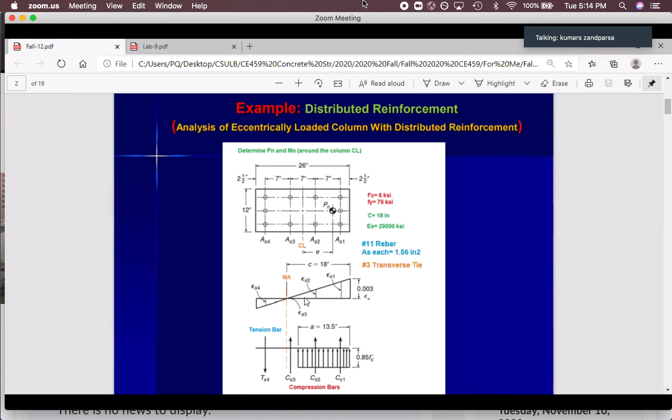That's it. So you can see from here to here is 18 inches. From this rebar to the end is 7 plus 7 plus 2.5, meaning 16.5. But this is 18, so it means that epsilon S3 for this rebar is in compression, because this side is in compression. When it's compression, we know that the compression for the concrete should be 0.003. That's epsilon U for the concrete.

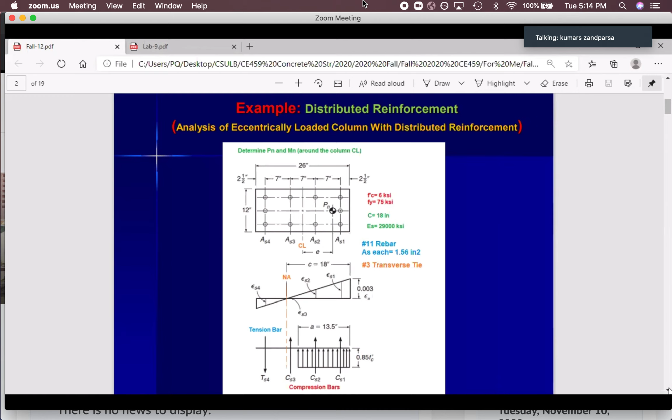Okay, then write the equation to find epsilon S1, S2, S3, and epsilon S4. We know those are in compression, so we can call them epsilon prime S1, epsilon prime S2, epsilon prime S3, and epsilon S4. Doesn't matter, see which one is good for you. But if you see either one, it will give you the information that you want.

Yes, what's the question? What was that point PN again?

That's the location of the point load. It means that the load is not at the center, so there's eccentricity. It means this column - that's a plan view of the column - has a load Pn plus a moment Mn. What's that moment? Moment is Pn times E. Can you remember from last week?

Let me show that. Consider we have a column - that's a column, down to the footing. That's the elevation view. So that's the center line of the column.

If the axial load is here, you have no eccentricity. Eccentricity is equal to 0. So in this case, you should show Pn here.

But if the load is on this side, as you might remember, if we have Mn and Pn, that's the axial load. Imagine we have both of them. In this case, I can show this like a column with this axial load on the center line, and I can show this Pn at whatever distance, with eccentricity equal E from the center. And this load is Pn.

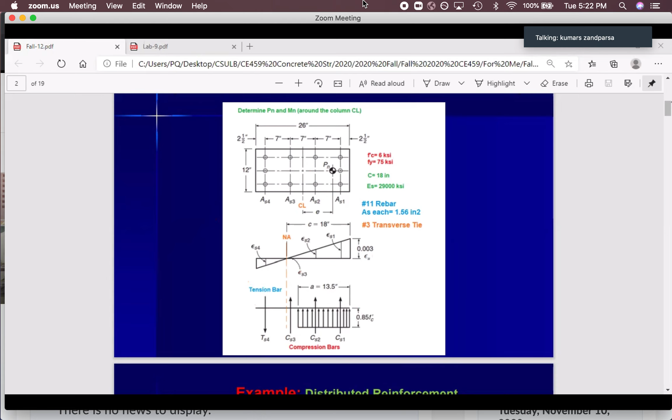I'm going to find epsilon 1. Start with epsilon 1. Over here I call them epsilon prime because they are in compression, but it doesn't matter. This is the compression part: 1, 2, 3 are in compression, 4 is in tension. So I renamed them epsilon prime to make that more clear.

What's the equation for epsilon prime in this diagram? Always for compression, this is their equation: epsilon prime S equals epsilon U times (C minus D prime) divided by C, times F prime S for this bar. That's actually epsilon U times this, which means epsilon prime S times ES. So epsilon prime S times ES must be less than or equal to FY. If it's greater than FY, consider that equal to FY. If it's less than FY, consider it whatever it is. In this case we are using very high grade and expensive rebar, FY 75 ksi.

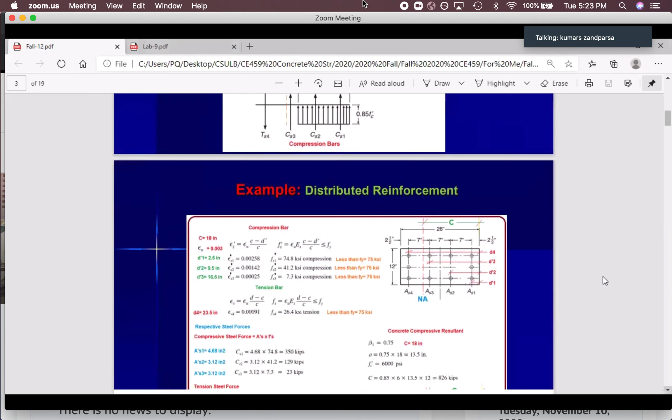So let's start with this equation and find these parts. I named them, look at this. For AS1, D prime is here. For AS2, we are going to use this equation. I named them just so you remember how to use them. Name them correctly and use them correctly.

For AS1, D prime is here. For AS2, D prime is here. Why D prime? Because these are compression bars. AS3, D prime is here. AS4, D4, because it's in tension. I changed them to make that more clear: 1, 2, 3 in compression, so I call them D prime.

4 is in tension. The solution here is not exactly the same as the solution in the book. I think this one is more clear, otherwise you have to jump from this side to that side to calculate those numbers. I think if you concentrate on this one and understand it, then go to the book and read that one, you can understand that as well.

So for all the listed givens, you put primes there just to know that what we're using is in compression, rather than getting confused if it might be in tension. That's correct, okay, that's correct.

First of all, show the neutral axis and all the rebar at the right side, because we have moment this side. If you have the right side, you have compression. The other side is at the E direction. Just remember, always at the E direction, all the rebar after the neutral axis are in compression, the other side in tension. So I can see two raised hands.

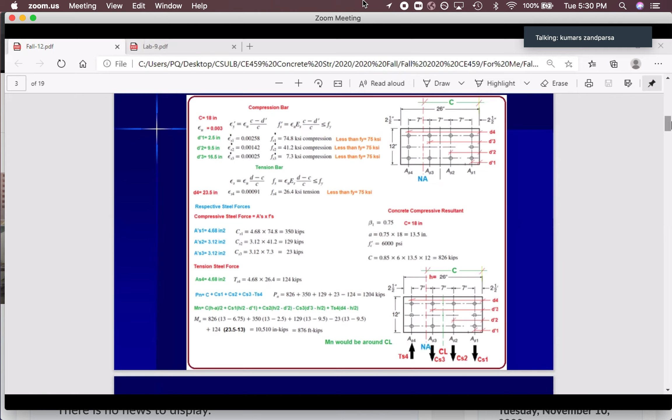Let me go back to this one. We have rebar in compression plus concrete in compression. Then we have rebar in tension. We might have 2 layers of the rebar in tension, or 3 in tension and 1 in compression. It doesn't matter, as soon as you know the location and whether it's upward or downward, show them correctly and then follow the instructions that I'm giving you here.

Yeah, that's it, it's too easy. Just try to follow this and understand. And if you have questions, ask me, to make sure at the end of this class you have no problem solving this kind of homework.

So how can we find beta 1 from the equation for F prime C equals 6 KSI? If you go to that, you will get 0.75. And C is 18. What's the equation? The equation is 0.85 F prime C times A times B, always. That's the equation we always have. That's good for beam as well, exactly the same as the beam when you are bending.

So what's A? A is beta 1 times C. We calculated beta 1, so we can calculate A. What is B? It's perpendicular to the eccentricity. We have eccentricity in this direction, so this is your B, 12 inches. A, 13.5. F prime C, 6 KSI, 0.85. That's your total C.

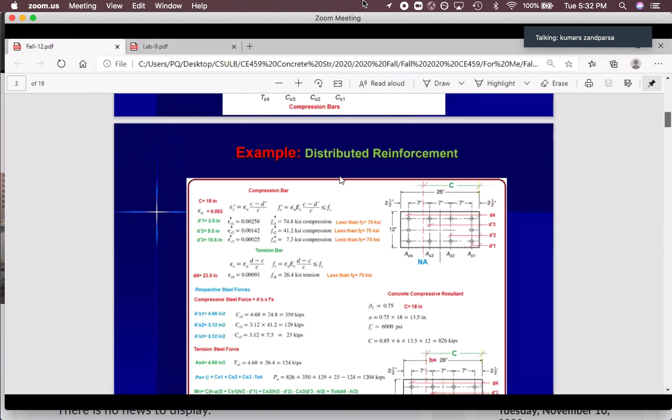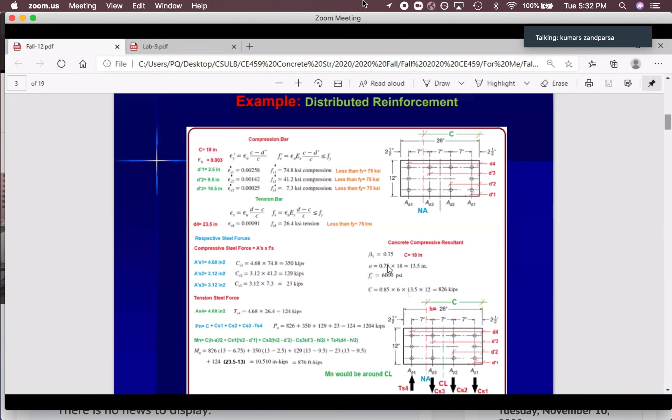So as you can see, let me show this one more time here. The total of this will sit at A over 2, somewhere out here. We have another compression from concrete, 3 compressions from the rebar, 1 tension from the rebar. Okay, so far we calculated all the tension and all the compression for the concrete and the rebar.

What about the tension in the rebar? Tension, we always go with the same equation. AS, we have AS4, 1, 2, 3 rebar. So 4.68, 3 number 11, times FS. FS4 is 26.4, plug it in here. That's it, do the same.

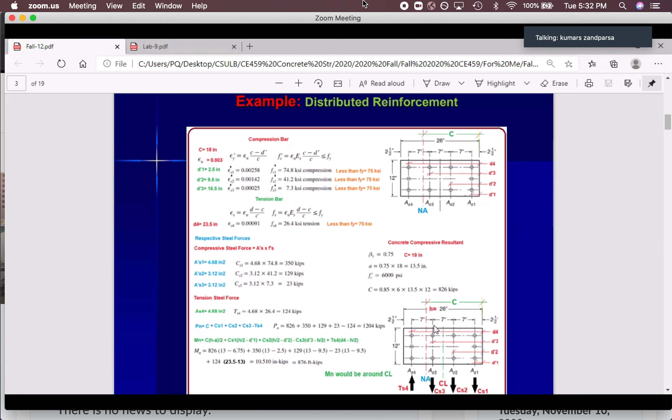But when you want to show them, show the tension in the opposite direction. Compression, for example, this direction, because you are pushing downward. So this is critical, to show them correctly. Compression will go down, down, down, and tension upward. And we have another for the concrete as well.

Okay, so how can I write and find the Pn? Always Pn is like this: total C. This is not neutral axis, this is force, meaning this one, total force coming from the concrete. It should be downward because it's compression. Downward plus CS1, look at this, downward plus CS2 downward plus CS3 downward.

If this one was upward, forget about that one. C, compression concrete, CS1, CS2. If we add just these two — but here this C is at this side, we have three rows of rebar under compression, so we will add all the compressions together, minus all the tension. Over here we have one tension. And we calculated all these forces.

C, 826. C1, if you go to this one, CS1, 350. CS2, 129. CS3, 23. Minus T, 124 kips. That's your nominal axial load capacity. This column can carry this much load for axial load.

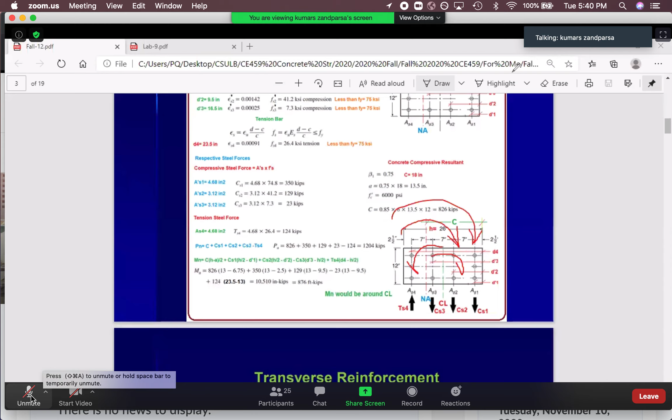Okay, D prime, let me show that to you. We calculated them here. Look at this. This is D prime 1, D prime 2, D prime 3, D prime 4, D4. Is that clear?

Professor, I think one of the things I noticed for D4, since it goes past the neutral axis, that bar becomes in tension. Sure. When you have a load at this side, meaning eccentricity parallel to the C, anything on the other side of the C should be in tension. The rest should be in compression.

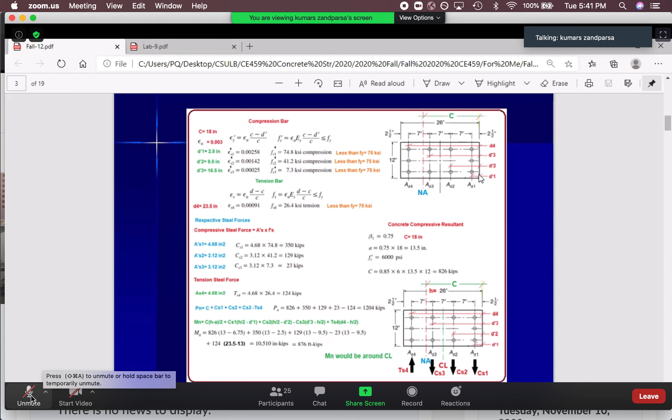Okay, clear? Yeah, perfect. So as you can see, follow this instruction. I try to make this as simple as possible, following from just one side. Instead of measuring from this side and that, it doesn't matter. You can measure from this side to find the distance from the center line to this, or center line to this one. You can do it from any other direction you want. But with this method, you will always measure from one side. Maybe it's easier, so hopefully it's easy for you guys to follow and understand.

And at the end, for the spacing of the tie bars, for shear reinforcement for the column, as you might remember, maximum tie bar spacing is the minimum of these three: 16 times the diameter of the main bar, number 11.

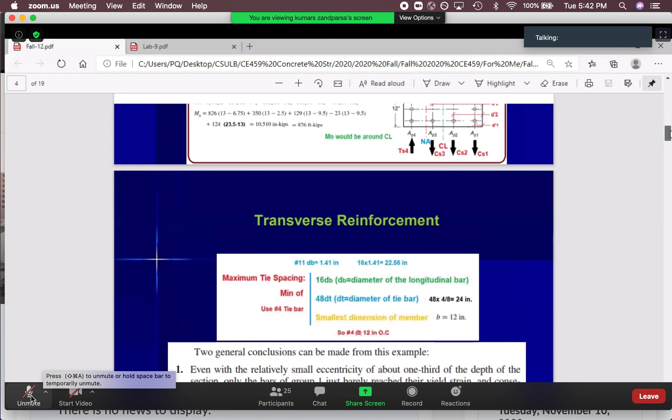Diameter is 1.41, 16 times of that. 48 times the diameter of the tie bar. We assume tie bar number 3, meaning number 4 here. Use number 4 tie bar. 48 times of that. Number 4 tie bar diameter is 4/8, so 24 inches. And the smallest dimension of the member was 12 times 26. The smallest dimension is 12. So between those three, pick the minimum of these three, so use number 4 at 12 inches.

This is the minimum required tie bars. You might go with smaller than this, but you can't go with more than this. You can't go with 16 inches, but you can go with 10 inches, 5 inches, not more than this.

Okay, but let me go after this to give you some more information. These informations are for those that want to compete in good schools, and I think all of you want to do that.

So can we see the designer made a good decision on this, picking 75 KSI rebar, very expensive KSI rebar? Is that a good decision or not? How can we catch that? Look at these numbers. Just this rebar got close to 75. Look at this, the rest is almost half, nothing almost, even tension is too low.

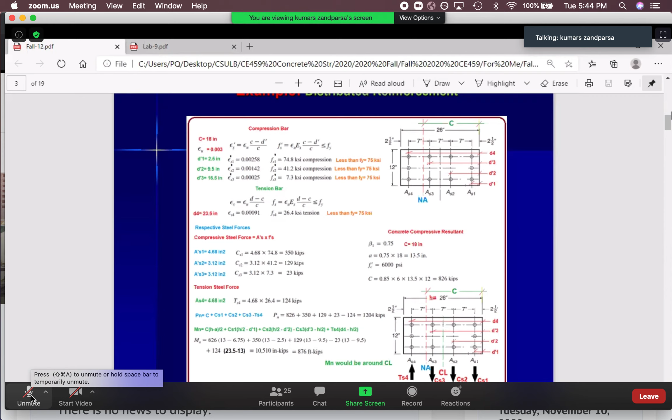So it means that wasn't a good decision to go after this kind of rebar with high strength, with expensive price that the homeowner should pay for, and get almost nothing. A quarter of the rebar will reach close to that, 75% of that is too low. So that's not a good decision. It's better to change the rebar installation or change the FY for the rebar. As you can see, this is not a good decision. And you can check that with the stress in the rebar to see if it's acceptable or not, a good idea. Okay.

Circular column. This is good for those that want to compete with other schools. What can I do? How can I do with this? How can I do this? Do the same, no difference.

Look at this, D1, D prime 1. Here is the neutral axis, so this side is in compression, the rest are in tension. So you can see CS1, CS2, C for the concrete in compression, TS3, TS4, tension, tension, compression, compression, and compression. That's it. Then go with this. That's the neutral axis C.

You know the C. Go with epsilon prime S, epsilon S for tension and compression, the same as before, nothing is changed. The only change is how to calculate the area of this part of the circle. That's it, because A times B is the area of that part, 0.85 F prime C AB. Over here, you know A, but there is no B. What's A and B? A and B is the area of the concrete under compression. So find the area of this part that is under compression.

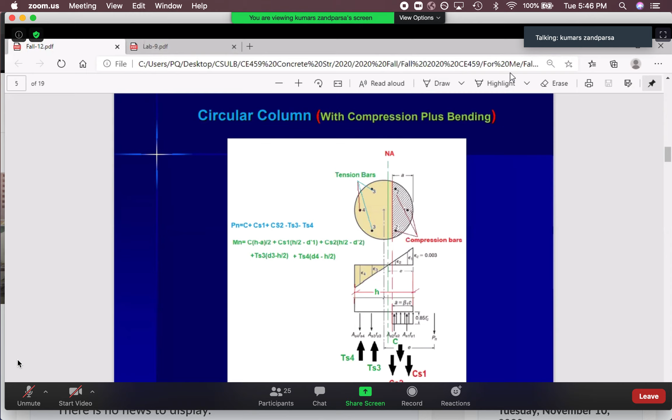Let me answer a chat. Why is the load distribution on less than half of the column? It depends on the eccentricity. When you have a huge load, huge eccentricity, you will get a small part of the column under compression, the rest will go on tension. If there is no eccentricity, the load should be at the center, so everything, concrete and rebar, should be under compression.

As soon as you get moment, you will put part of the column under compression, another part under tension. If you have huge eccentricity, sometimes the point load will go off the concrete. It means that moment is huge. Moment divided by P will give you the eccentricity.

Based off that, you can actually find the C. Once you know the C, you can consider what rebar is in compression and what rebar is in tension. That's it.

How can you calculate this part? I'll ask you guys, if you like, go and learn. It's part of the geometry. It's not that hard, but you can calculate this part.

I'll give you some easy solution because we're getting out of time and I have a lot of other stuff to cover. If I connect this to this with a straight line, assume these are a straight line, you have a triangle here. Assume this is a straight line from center of the column.

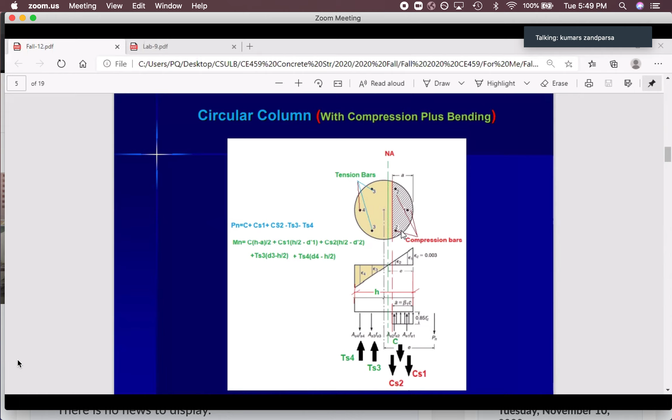Show to yourself that you can do it. It's not that hard for you. Okay, then as soon as you find that, that's it. The equation should be exactly the same, no difference, except a over 2 for this one is not a over 2.

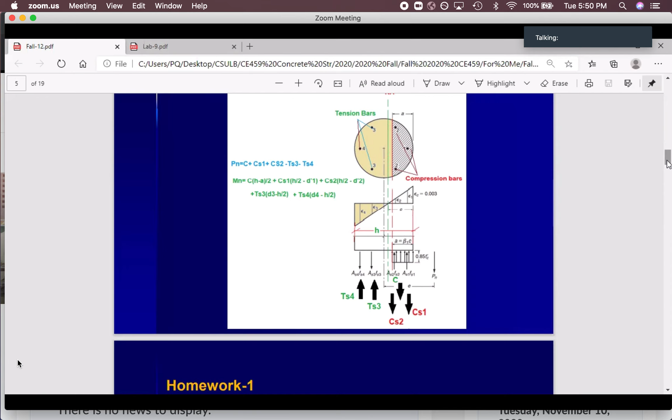The distance from here to here, you have to find that location of the centroid of this part of the circle. So it's not that easy, but based on the integral method, you can find it. Or if you go to the statics book, they give you this part of the circle, they show you this CG. Because of that, as I mentioned, this is not part of your exam for this course.

Okay, then I gave you another homework, but look at this. I gave you C based on the distances. You can see all these rebar are in compression, the others are in tension. I named them AS1, 2. I didn't show which one is compression.

But because the load is at this side of the center line, you have compression this side of the neutral axis, tension the other side. Remember, if the load was at that side, compression this side, tension other side. If in the exam I change the location, it doesn't matter. So if I show the point load at this side, that's the center line, it means compression at this side, tension at the bottom part.

So I can play with this, put it here, here, or here. Then the only thing that will change is the compression part. The equations and the others will stay the same.

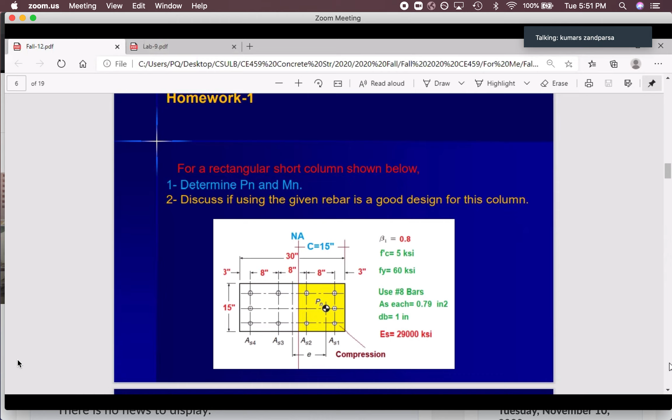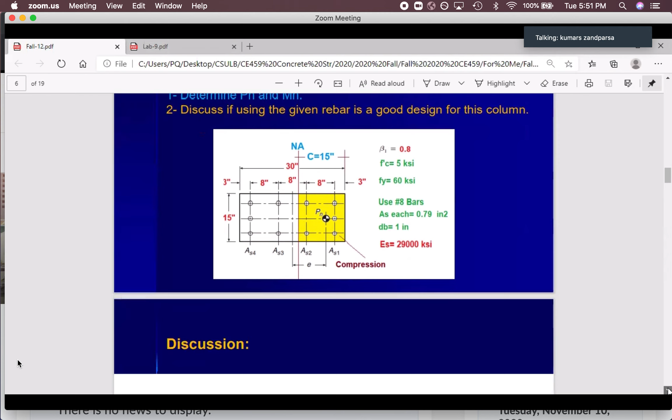So I'd like everybody to go after this, solve it, and send that to me please, and then let me know if you have questions. But before this, go and do that example a few times. Please do it, please do it. Okay.

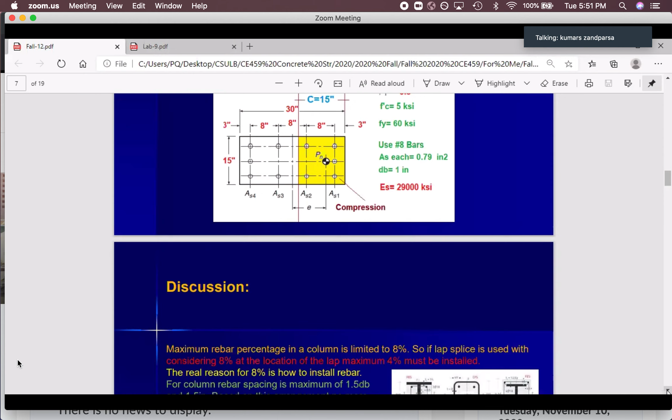I like to let you know this because it's important in code: if somebody asks you why the concrete column rebar percentage is 8%, based on the code, you need to know the answer. If we add steel to the concrete column, we increase the capacity, and we have profiles inside the column, so for sure it's more than 4%. If it's allowable, why isn't adding more rebar allowable?

The point is, if you put a lot of rebar where you have lap splices, remember from the development length, when you continue the rebar you put them close together and keep going up the column. So you have double the rebar - for example 4 bars, and for the top part you add more bars, another rebar for each one, at least to keep going. If you have more rebar in between, you have to add another. So you make kind of a wall, and that's not good, because the small, fine material of the concrete can go to one side while the big rocks stay with no mortar. Mortar acts like glue in the concrete, so if the glue goes one side and rocks stay here, the strength of the column isn't good.

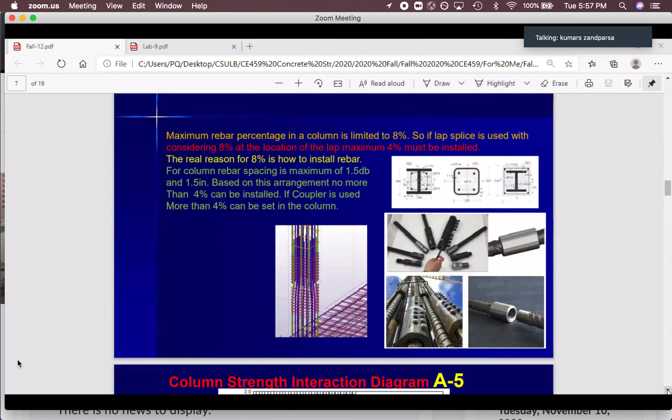Okay, let me answer: is rebar allowed to be welded together instead of using a coupler? No, no - that is very, very restricted. For earthquakes, in high risk zones, there is no welding allowed. If you have to weld, you have to check every single one to make sure that if you pull them to FY, the weld will not crack - the collapse should happen in the rebar, not in the weld zone. Because of that, it's not allowed in any column in a high risk zone. No, you can't do that. Okay, good question.

So for the column, I've shown you how to calculate the moment capacity and axial capacity by hand. As an engineer, you must be able to do this by hand. Imagine you don't have access to software - how can you design the column? I gave you some information for hand design based on the code design. How can we use this?

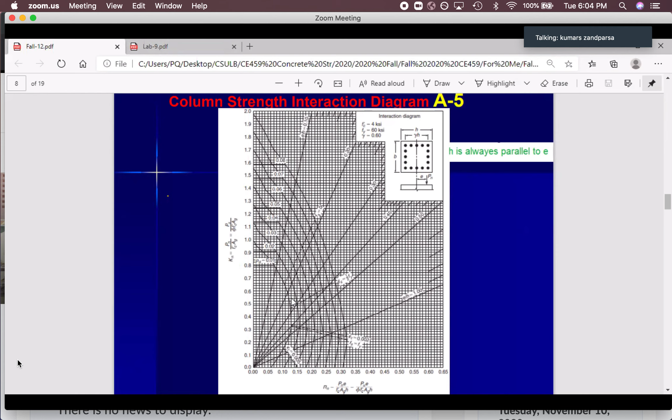Based on the loading, find this number, find that number. For example, one here, go a straight line, and based on the number that you calculated, go and find the cross section. If the cross section is inside the percentage of rebar that you have, or on it, that column is capable to carry that load. If it's outside, it's not good. You have to increase the F prime C, or change the size of the rebar, do something to make that good.

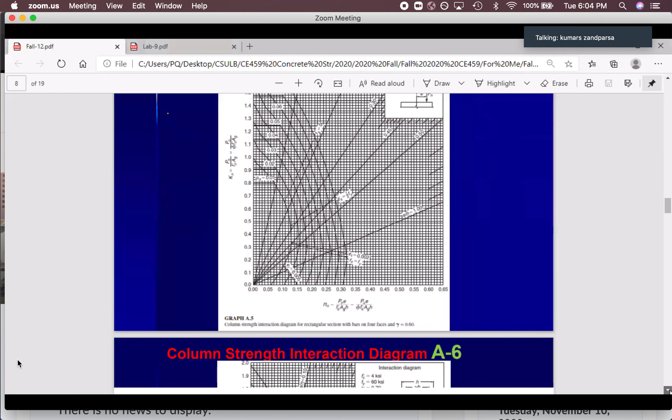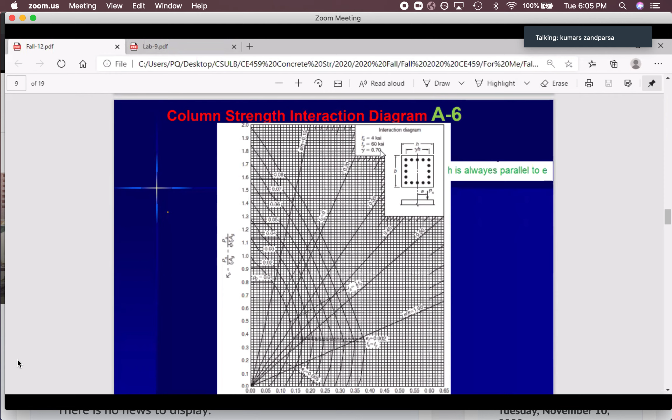Okay, another chart, same as the other one. Look at this, 4 side equal, F prime C 4, FY 60, but instead of 0.6, it's 0.7. So if you have 0.6, but what about 0.65? There is nothing for 0.65. They have 0.6, 0.7, 0.8, something like that. So what can I do for between? You have to use interpolation. Find for 0.6, find 0.7, and then find for between them. I'm solving one example for that as well.

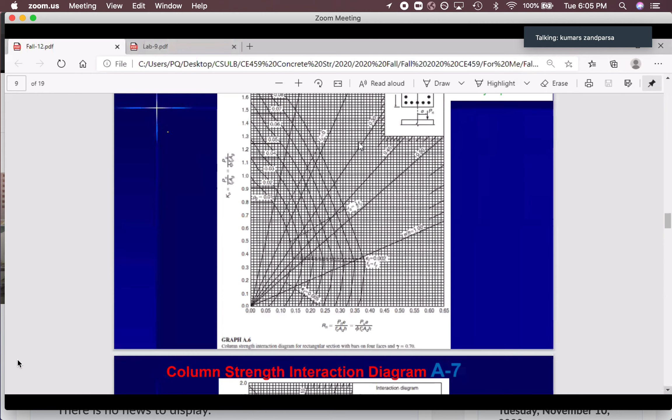Okay, these are different charts. As you can see, this one is the same, everything is the same, just 0.8. And this is for two sides moment, two sides equal. It doesn't have to be 1,2,3,4,5 always, it can be 2 and 2, 3 and 3, 4 and 4. That's it. But there is nothing we can use this chart for. Again, it has 0.6, 0.7, 0.8. I put some as an example for you guys here.

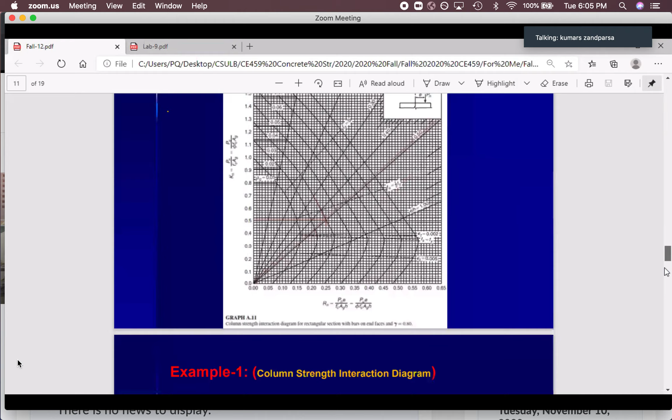Let's solve one example based on this. Right now, we have the knowledge to go after this and find the answer. Okay, imagine we are going to design this column. This is a frame. We analyze that, and we want to use F prime C 4 ksi, FY 60, and this is our epsilon S. We are going to design this column. We did the analysis for this structure, and these are the loads that we got.

We got for load case 1, ML and MD, moment caused by dead load, moment caused by live load, P caused by dead load and live load. Case 1, PL, PD, ML and MD. Load case 2. So we have to find the percentage of rebar for both cases and pick the maximum, because this column has both cases. So the column must carry the maximum, but we can compare these two to see if it's acceptable or not.

We have to go through all the required ACI steps, actually step by step, to check it and see if it's correct or not. Okay, what's the column? The column is 20 by 25, as you can see here.

We have eccentricity, E, and this is your Pu. H is always parallel to this, and what's the E? It's Mu for D plus L divided by Pu D plus L, or Mn divided by Pn. Doesn't matter, because this one will get phi, this one will get phi, and those two can cross out. So Mn and Pn, or Mu and Pu, all of them will give us the same thing, but not Mu divided by Pn. That's wrong. Mn divided by Pn, or Mu divided by Pu, will give us the same eccentricity.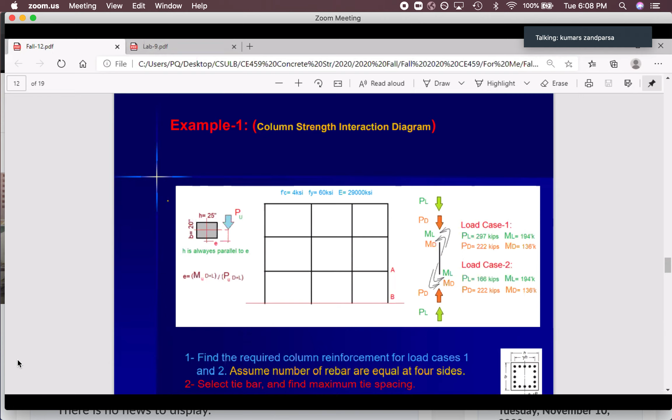Okay, we want to check and find the maximum percentage of rebar, and we know we want to use the column, yeah, that we know the size of the column. We gave you the size, and we want to have equal rebar at each side. So we know what chart we are going to use.

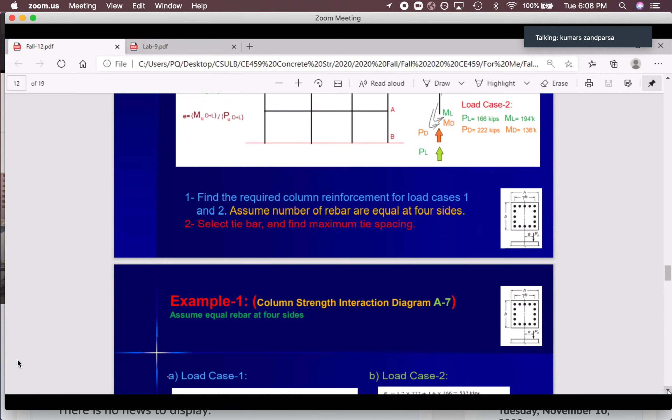In this case, let's start with the loading. We know that for load case 1, load case 2, go with this one. 1.2 dead load, 1.6 live load, that's your Pu, ultimate load. Mu, 1.2 moment dead load, 1.6 moment live load. That's it, and we assume that we have 2.5-inch cover from concrete to the center of the bars.

We assume this, so your gamma should be what? H is parallel to E, minus 2 times the D prime, meaning 2 times 2.5, divided by H, the equation that I gave you. In this example, we made that simple, you don't need to do interpolation. We got 0.8 that we have a chart for. Then calculate Kn. Kn was Pu divided by, forget about this phi, Pn divided by F prime C AG, or Pu divided by phi F prime C AG. Both of them are the same.

In this case, we have loading Pu. So for Pu, it's better to use this one. Always phi for the column is 0.65. For moment or for axial load, always phi 0.65. F prime C 4 KSI, AG is 25 times 20, 500.

That's AG, B times H, 20 times 25. You will get 0.57. What's the Rn?

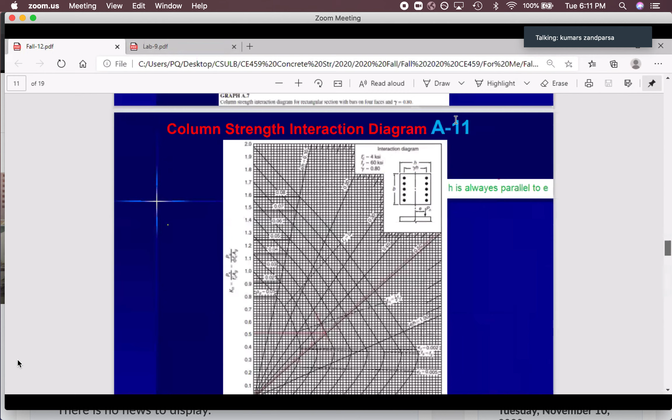So in this case, we have to go to graph A7. Why graph A7? Let's go and figure it out why. Look at this - you can see F prime C 4, Fy 60, gamma 0.8, equal rebar either side. That's the chart that we must use.

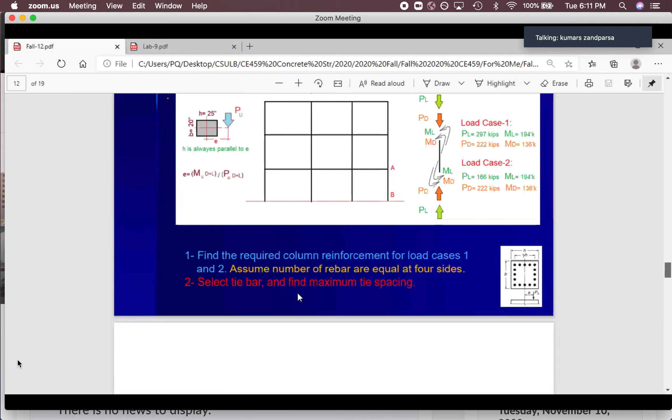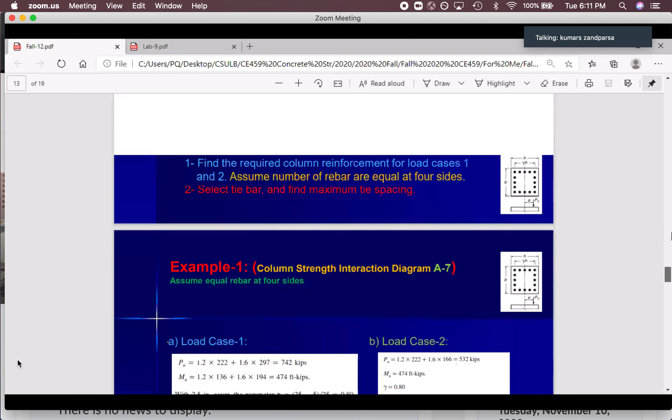That's that easy. Then Kn - look at this. We calculated 0.57, 175. Just remember those numbers, 0.57, 175. Look at this: over is 0.60, 0.58, 0.57 is between this Kn - 0.5, 52, 54, 56, 58, 60. 0.57 should be between.

I will draw one line between those two. Then 0.175, okay, 0.15 to 0.20. 0.15, 16, 17, 18, 19, 20. So each one is 0.01. So 0.175, 0.16, 0.17 - 0.175 should be at the center of this.

Plot one horizontal and vertical line here. The cross section between these two will give you the percentage of rebar. 1%, no. 2%, no. 3%, too much. Something between these two, so you have to measure this - it's 2.5%, 2.4, 2.6, depends on the location that you can measure. This point, the cross section of these two, as you can see, is closer to this side than that side - a little smaller than 2.4%. 1%, 2%, 3%. This one is 2 point something percent.

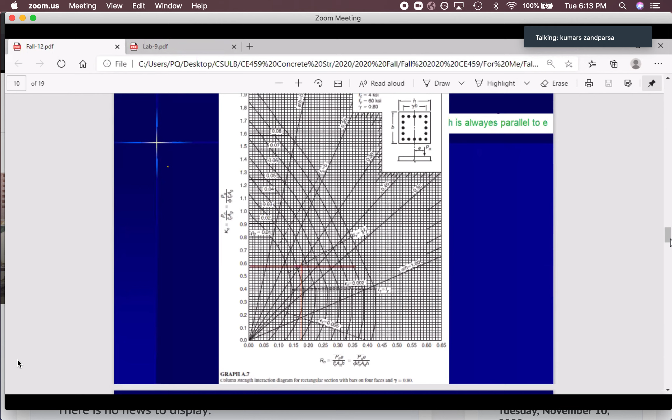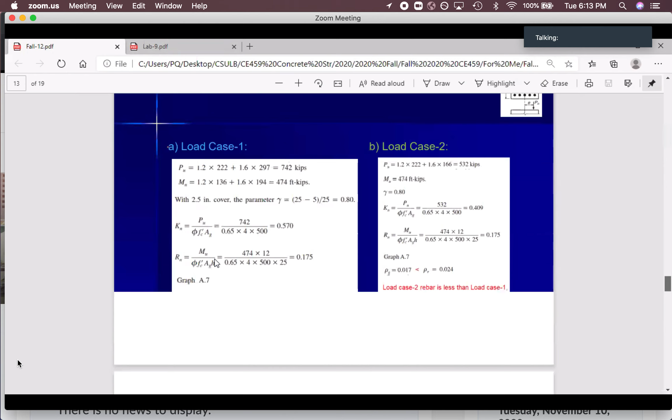Okay, let's go and see here. 0.024 means 2.4% divided by 100, because that's the percentage. So your rho is 0.024, or 2.4 divided by 100. Yeah, because 2.4%, 2.4 divided by 100 - that's the percentage of the rebar.

What's the AG? AG, or your cross-sectional area, is 20 times 25, B times H. So your Ast rebar should be the percentage of rebar times total area of the concrete, 12 square inches. So we will pick 12 number 9, meaning exactly 12 square inches.

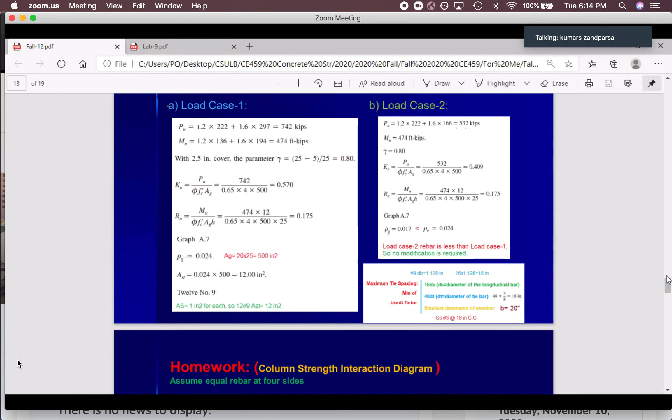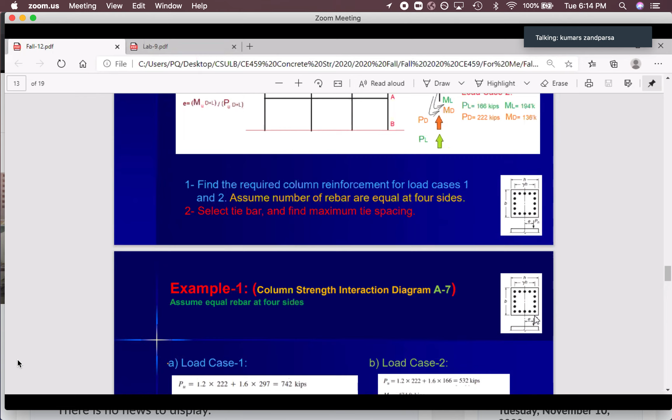So 12 number 9 means that each side you should have - let me see - you want to have 12. 1, 2, 3, 4, 5, 6, 7, 8, 9, 10, 11, 12. Means either side you should have 4 rebar - 4, 4, 4, and 4. That's it.

As you can see, do the same, go with these two numbers, you will get 1.7%. So which one is more critical? This one - so this is your final answer. If you have 3 load cases, 4 load cases, do the same and pick the maximum percentage.

That's your final answer. And then for tie bars: if we use number 3 up to number 10 vertical rebar, we use tie bar number 3. Above 10, we should go with number 4 at least. If you go with number 4 for number 10 and 9, it's good, but if you go for number 11 with number 3, it's not good, it's not acceptable. At least number 4 for more than 10, and number 3 for less than 10 - not number 2, never number 2, number 3 and above.

A spacing maximum of those 3, and we know how to calculate this. That's it - if you got it, you got it.

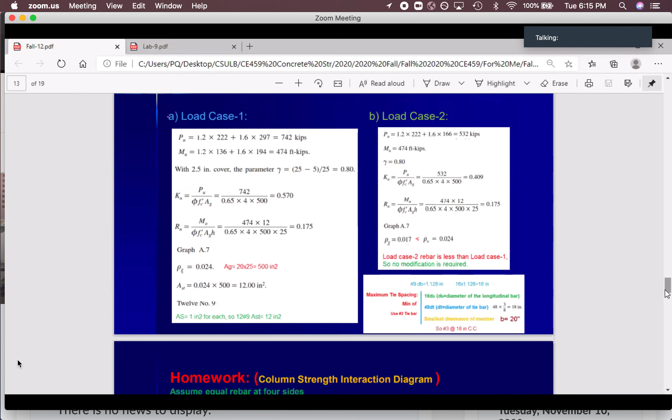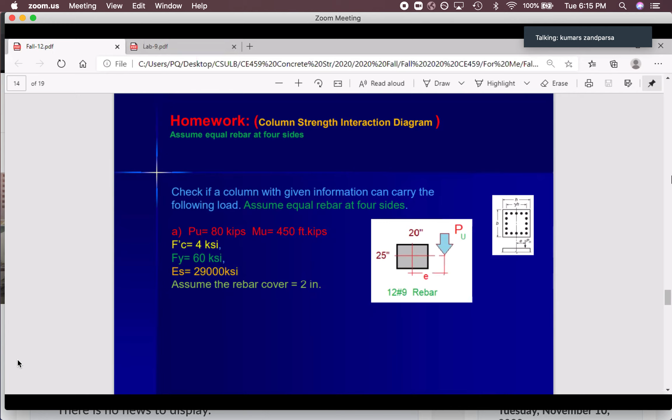That's the column, and I gave you 20 and 25 with this eccentricity with one load, and I asked you - I gave you the assumption that the rebar cover is 2 inches. I wanted to make that easy for you guys, so you can calculate that one for homework. So far, I gave you 2 homeworks for this week.

Another example: we want to design this column in this frame. After analyzing this, we got Pu and Mu. There is no dead load and live load separately - we had them, but we find the total. So in this case, we want to calculate the size of the column.

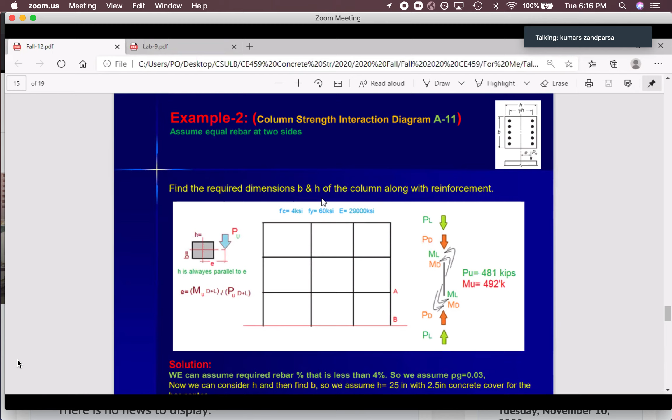We don't know B, we don't know H, we don't know. But we know Pu and Mu and other stuff, and we want to find the rebar and size of the column. Like always, assume something. We know the percentage - so we assume that rho G is 3%.

You can go with 2%. If you have limits as before for the beams, the architect will give us the limit. So based on that limit, we cannot go with any size that we want. So we have to play with this: go with 3%, then you can see the size is too small. Then you go with 2%, and 1% is too big. So you can figure it out yourself.

So just learn this, how to use this, then you can play with it and change the size of your column. We assume that 3% is good, less than 4%. Then because we still have 2 unknowns, B and H, I can't calculate that, I can't design like the beam.

I will pick another one. In this case, because we know the answer that 25 is a good number for this, we went with this. But if you go with 20, you can see your B is too big. You don't want that, it's not good based on the architectural limits. So you have to change that and play with this until you get the number you want. This shows how to do it, and you can play with these numbers and get different numbers. That's it.

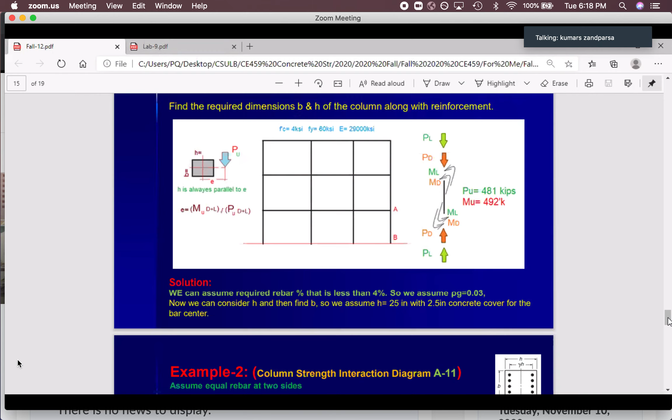So right now we know percentage, we know H, but I have no idea about B. How can I calculate B? For the gamma, it's H minus 2 times cover, divided by H. So 25 minus 2 times 2.5 divided by 25, 0.8. So we need something like this with F prime c = 4 and Fy = 60.

So we have to go to A11, both sides rebar. We don't want rebar at four sides. In this case, how we can go with this, I will talk about later. But when you know you want to go with this, you can go with 4. But whenever you go with 4, this rebar here will not work that well. Just these two will give you the maximum capacity for the moment in this direction.

The rebar here will get less tension, less compression, less. So those will not carry that much load, so you will lose rebar. It's better to go with 2.

But if you have moment at both directions, so your P is not here, not there, it's somewhere around here. It means you have moment around X, you have moment around Y. So in that case, the best case is equal rebar four sides. That's the answer. If somebody in future asks you when are you going to consider rebar at 4 sides for a column, the best answer is when we have eccentricity at both directions, meaning moment around X and moment around Y. In that case, the best answer is equal rebar.

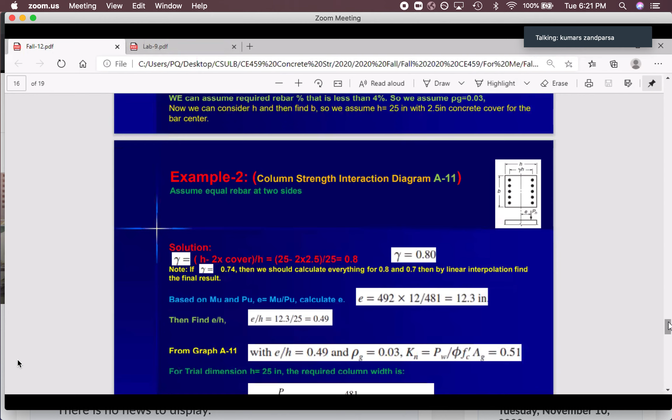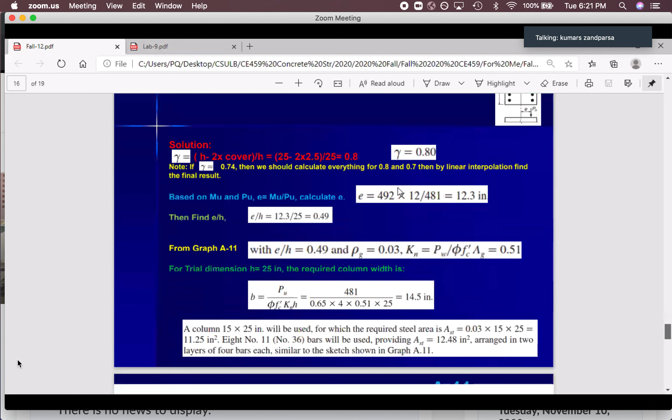Then go and use that graph A11 based on this information to find things, because we know the percentage. So percentage is not that important for us right now. The problem is finding B. So what we did, we calculated E over H.

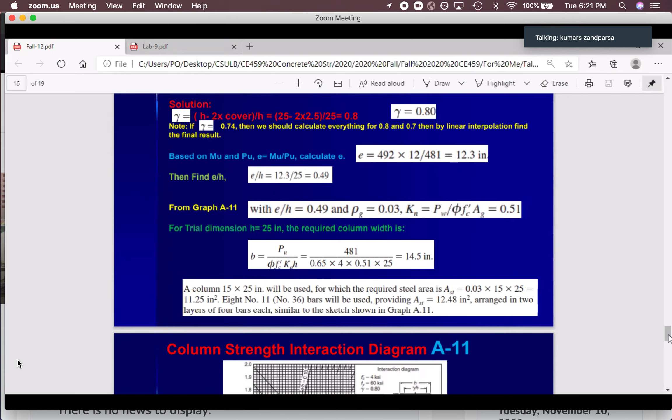And we know the percentage of the rebar. This is the percentage of the rebar, 3%. Look at this. This is your 3%.

And look at these lines. These lines are E over H. You can find them on all charts, all of them. So whenever one of the element dimensions are not clear and we have to find them, you have to do whatever I'm doing right now. We use 3%, and we use E over H.

Then intersection with 3%. And plot one horizontal or vertical, doesn't matter, you will get the same answer. But we went with the horizontal.

Read Kn. Kn is Pu over phi F prime C Ag. Read this number, read this number. That's it, then the problem is solved.

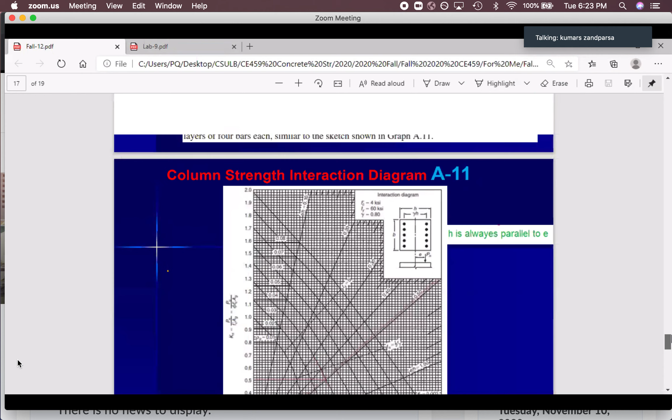Based on the interval E over H 0.49 and 3%, we read that Kn is 0.51. Based on this, I know that I can rewrite that Pu divided by phi F prime C times BH is Kn, times Ag. Ag is BH, so that's the equation for Kn. Kn is equal Pu divided by phi F prime C Ag.

Then instead of Ag, I will write BH. Then I will change the location of B and H. B over here, H over here, Kn over here. Then plug in the numbers: Pu, 0.65 for phi always, F prime C times Kn, times H. That's the minimum required B.

So if we go with 15 times 25, we should be good. That's it, as you can see.

Then ASC, what's the ASC required? 3% of 15 by 25, because we came up with B15, so we will get 11.25. Then we will use 8 number 11, it's almost 12.48. 8 number 11 means 4 at this side, 4 the other side. That's the design for this column.

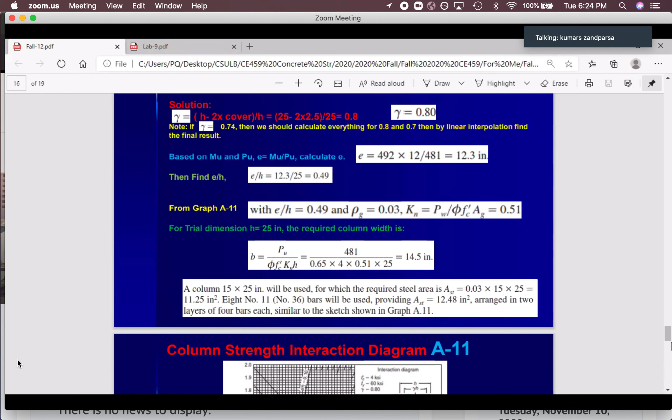As you can see, it's very easy to actually follow the instructions, and this is the design. Any question?

Let me read one chat. Why is there 2 phi in the equation of Kn? Let me see, there was 1 phi, not 2. Let me show it to you.

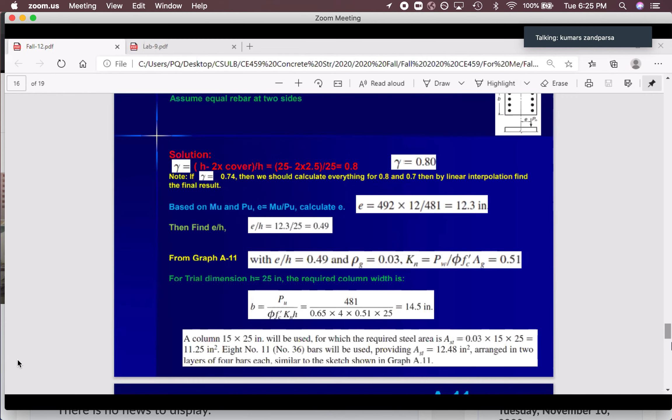Look at this. Kn is equal Pu divided by phi F prime C Ag. Let me read that again. Even after converted to Pu, look at this: whenever you have Pu, you have phi. Otherwise, if it's Pn, then there is no phi. Just remember, let me go back to this equation. Look at this: Pn F prime C Ag, or Pu divided by phi F prime C Ag.

Whenever you are using Pu, you must have phi. If you are using Pn, there is no phi. Or Mn, Pn times E means Mn, no phi. If you are using Pu or Mu, you must have phi. Did I give you the answer?

Okay, thank you. Yes, for columns, phi will always be 0.65, always.

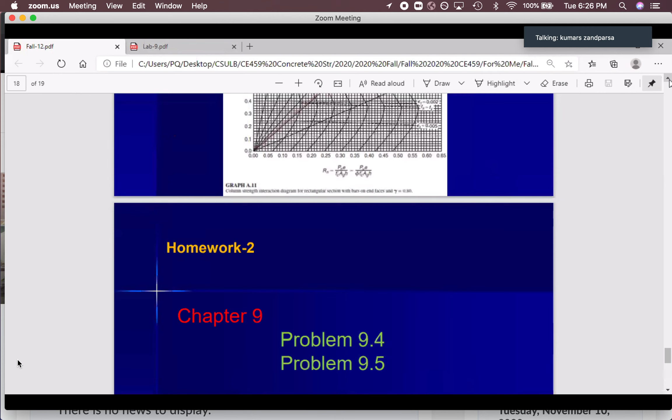So you have 15 by 25, that's total cross-sectional area. Got it. Thank you.

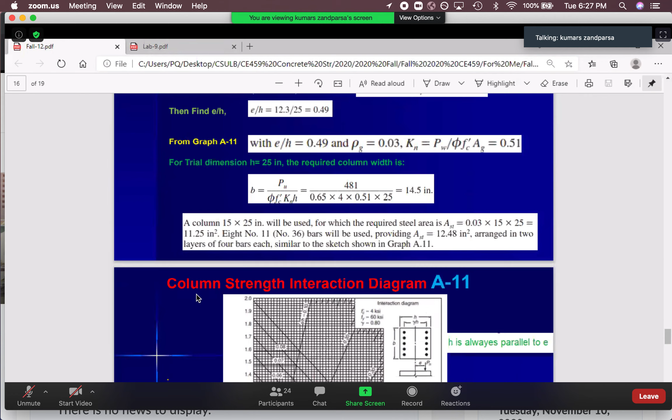Any other question? Is there any question? No question? You got it completely? Perfect.